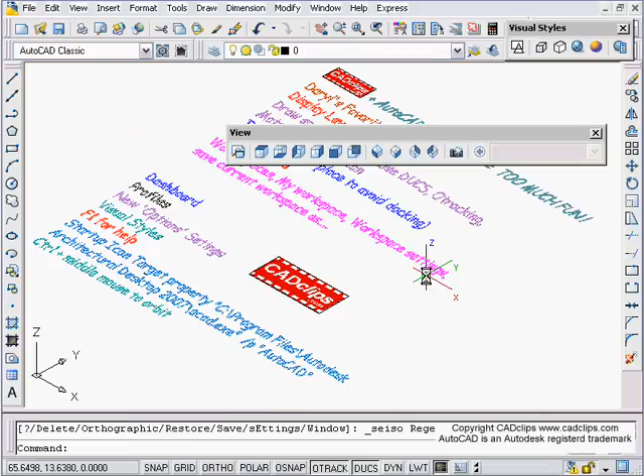So I'm going to zoom out a little bit over to here, and using my view toolbar. If you right click on any toolbar, you can see all the toolbars, and there's lots in there. I'm just going to start by going to, for instance, a southwest isometric view on my view toolbar. And now I want to draw some solid objects or do some modeling. So I'm going to right click in here and grab my modeling toolbar.

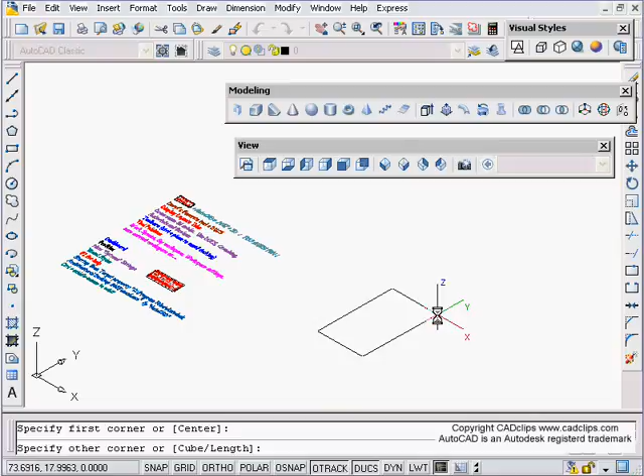We'll show you later how you can use workspaces to save all these configurations. So I can start by clicking on the box tool, drawing a box, placing it up. If I have my visual styles toolbar, you can click on here, and you can see different visual styles for that 3D object. You'll also notice that visual styles actually affect text as well. Kind of neat when you zoom in on it. So different things you can do with that.

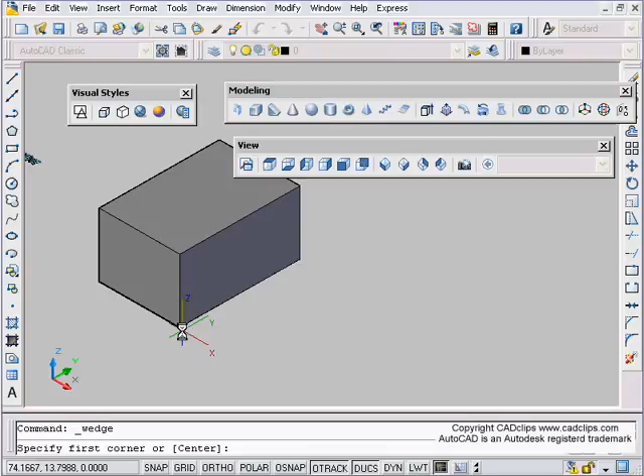Now what I can do is, to continue along here, I'm going to draw kind of a wedge here. So I'm going to click wedge. I need an object snap, so I'm going to hit my F3 or turn my object snaps on, and I'm going to use object tracking and lay a node in over there. Placing it once places it, hovering again removes it. So I need to replace that.

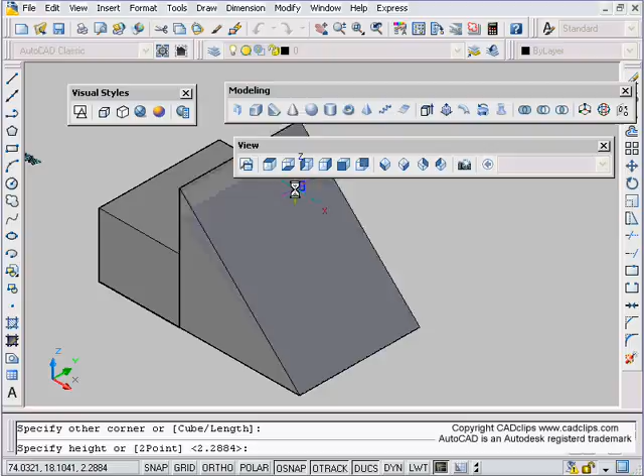Now I can drag down like that, and then I can drag up, and if I can find that endpoint, I can click on there. I might have to change to wireframe to make that a little easier. Let's try that again just so you can see what's going on. I'm going to click on here.

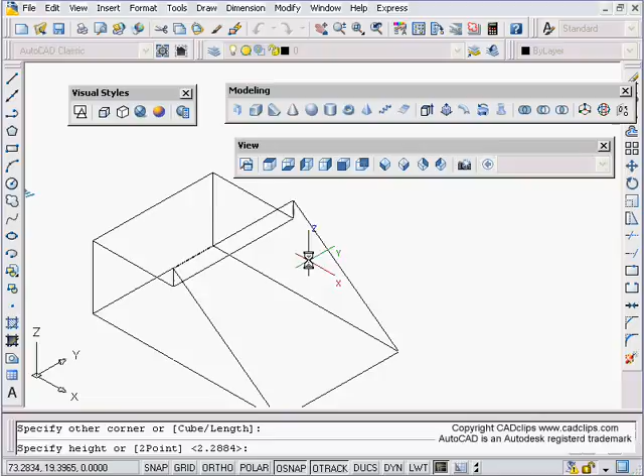I'm going to place, oh, now my UCS. I don't need my DUCS for this one. DUCS. Wedge from here. Notice it started to draw up the side of that wall. Click. And now I can go pick that endpoint. Okay, I had to turn my DUCS off because the purpose of DUCS is that I can do this. Go grab, for instance, a cylinder command.

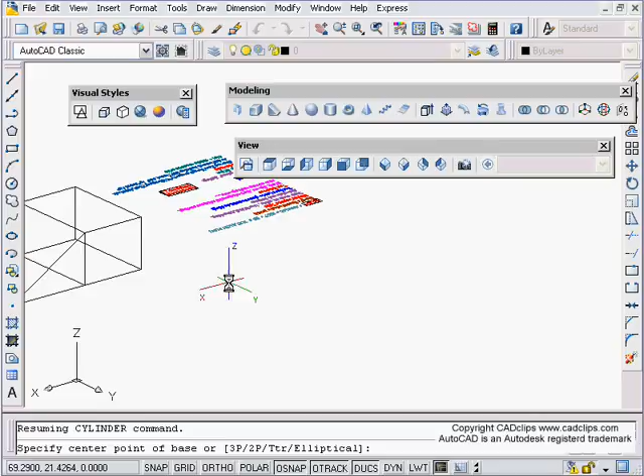If this is on, which was what it was doing before, now I can hover over a different face and draw right on that face, which is absolutely wonderful. And using shift middle mouse button, you can orbit around. So I can pick on a face. Not only that, I can use my object tracking by picking points, a midpoint there and a midpoint there. And if I drag down, guess what? Now I'm drawing that cylinder directly on that face of that object.

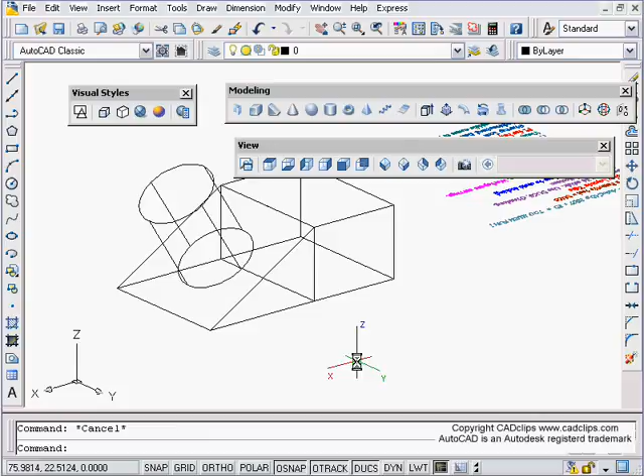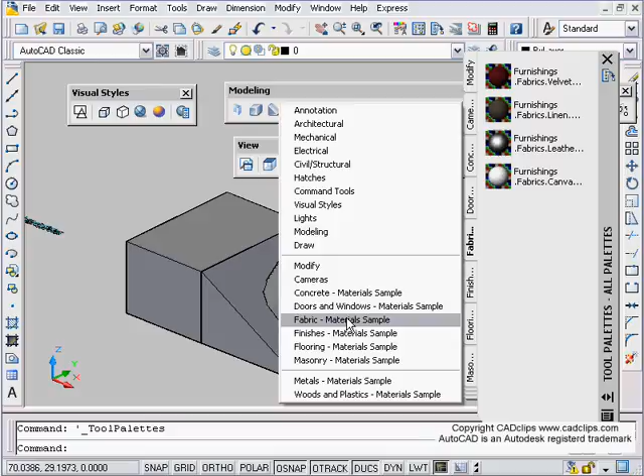Shift, middle mouse button, spin it around, go back to my visual styles, see what I have. I might go into here and click on my palettes. Inside of my palettes, I've got lots of different palettes in the palette set, and I can go, for instance, to a fabric material, and I can pick on that material and change that. Depending on my visual style will depend on how that will appear.

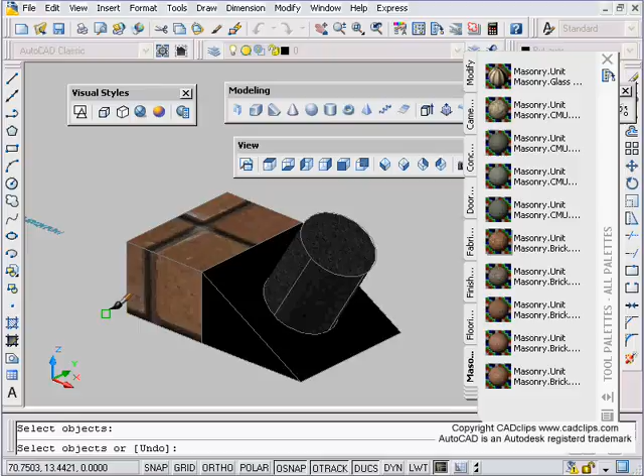Go back to here. Pick a different material, masonry perhaps. Masonry unit, brick modular. Click on there. We can talk a little bit about scale factor and sizes. Pick on here. Use that material, whatever you want. Now I want to draw a cylinder and remove it from there. So watch what happens. I'm going to draw a cylinder now.

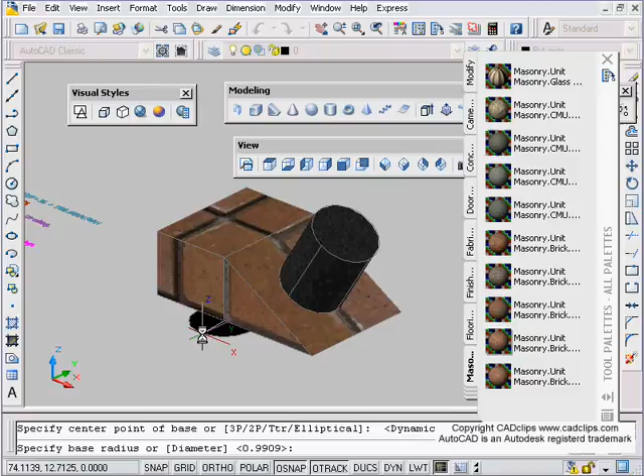The problem now is if I try to draw that cylinder, I'm going to draw on that wall, which is great if that's what I wanted to do. Off of that face, I'm going to erase that. I'm going to draw a cylinder. This is where we need to turn the DUCS on. Pick a point, drag there, drag up. Now I'm going to right click on here, go to my solid editing toolbar, and use my subtract and say subtract from here and here, enter, this object, enter, and it removes that section.

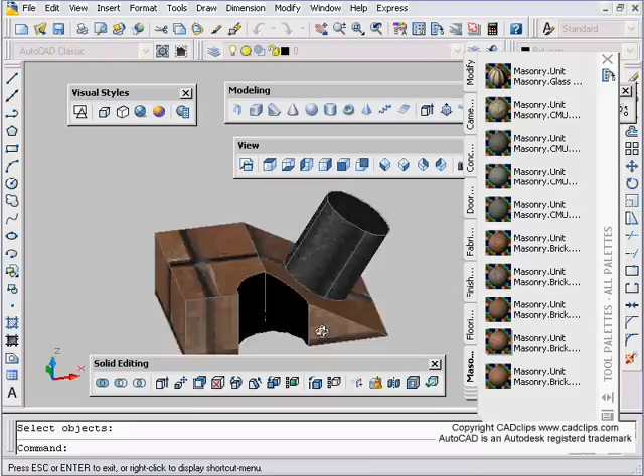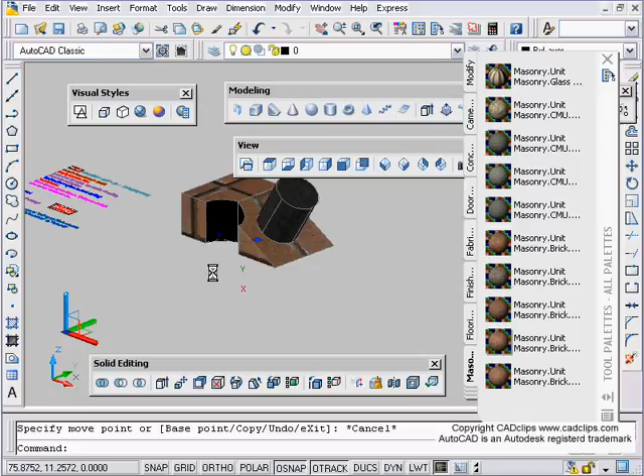Shift, middle mouse button. Anytime you want to move anything, you can click on the object, and then if you go over to your UCS icon, you can click on an axis, and then you don't even have to say move, you just drag it on that axis. If I want to move this straight up, click on this object, hover over the blue axis, pick once, move up, and then type in a number or displacement.

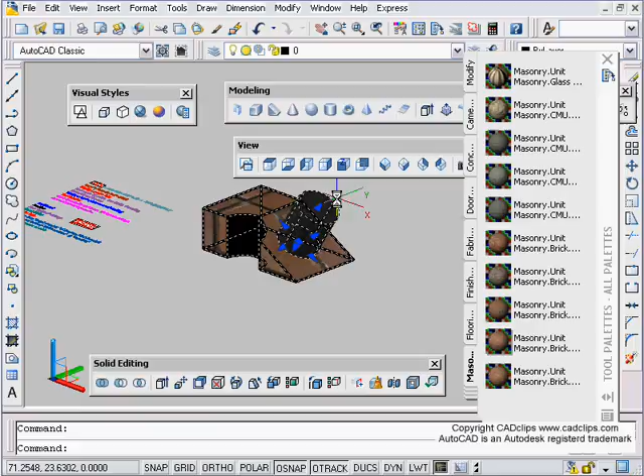What happens if I pick on here and do this? Oh, I have more than one object. Hit escape a couple times. Do a regen. Pick on this one object. Move here, and I can move that guy over there. If I want to switch in between, all I have to do is hit escape, go back and pick on here. I don't have to reselect the object. Look what I'm doing. Pick on here, moving it across.

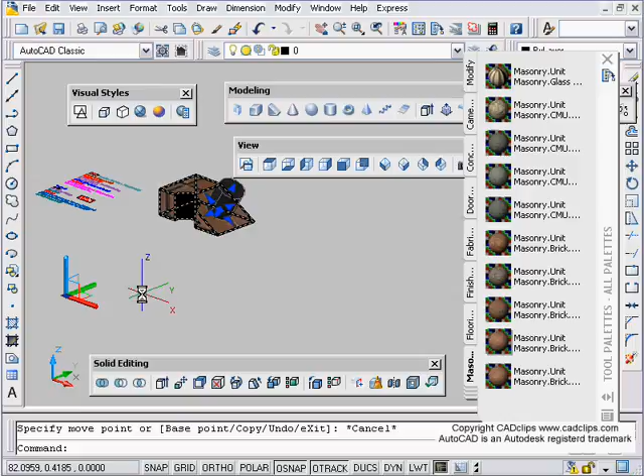So moving in 3D, combining this little tool right in here, you can type in a number, and using our DUCS command to draw on certain faces. Shift, middle mouse button, spin around here.

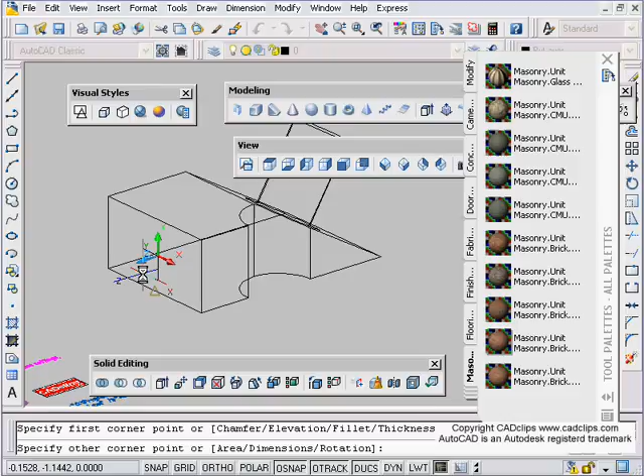Okay, maybe I'll just go back to a hidden view. I want to draw something on there. Okay, I can use my rectangle command. I can hover, place a node, and then I can track to that location, and then I can draw a box. Oh, I used my snap, but that's okay. I can stretch

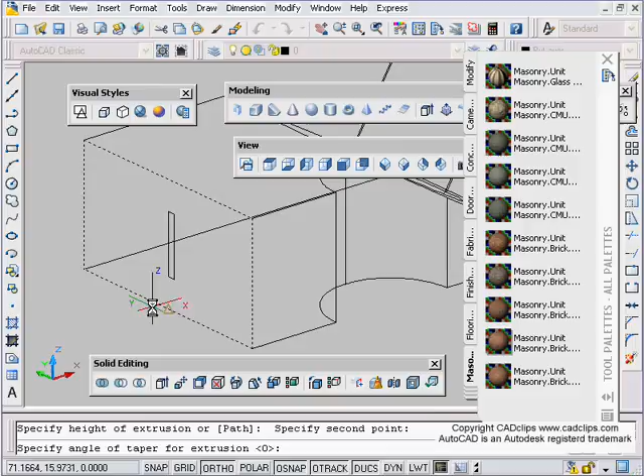or use my shift, grab two grips, move that up. Okay, I can take that and extrude that out if I want. Extrude this, enter, that type of thing. Oh, I extruded the big piece.

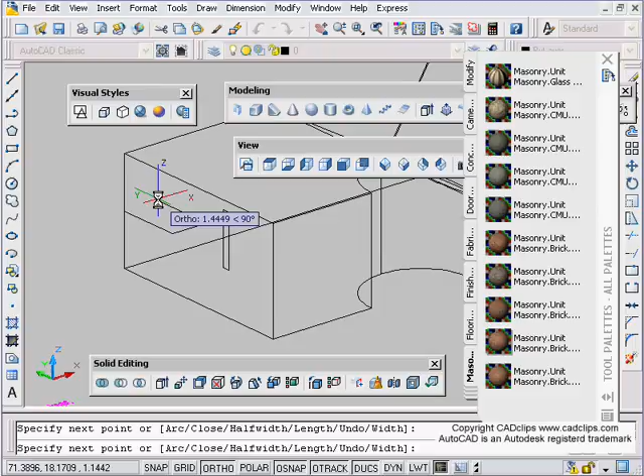Okay, so anytime you want to draw an object or an arc, you can pick a face, wrong type of arc. Okay, maybe a polyline from here over, and around depending on what you want. Place a snap mode, click, click. Okay, start it on that face. Doesn't matter. Shift middle mouse button. You can see where that is.

Okay, visual styles, etc. So just kind of puttering around a little bit with drawing on edges and drawing on faces, and we'll get into more of this a little bit later where I'll show you a little bit more control. Okay, so let's just go back to the top view here. Okay, use DUCS, the layouts tab, draw some solids, use our command, object tracking, throw some materials, and Boolean operation, which is our add and subtract and union and interference.

Okay, we've got a bunch more in here, and we do have some more training videos and CAD clips at DGCAD or CADclips.com, which go through this specifically. I'm not going to go through all of these again. We've already got some CAD clips on that in our 3D AutoCAD 2006, so this hasn't really changed much.

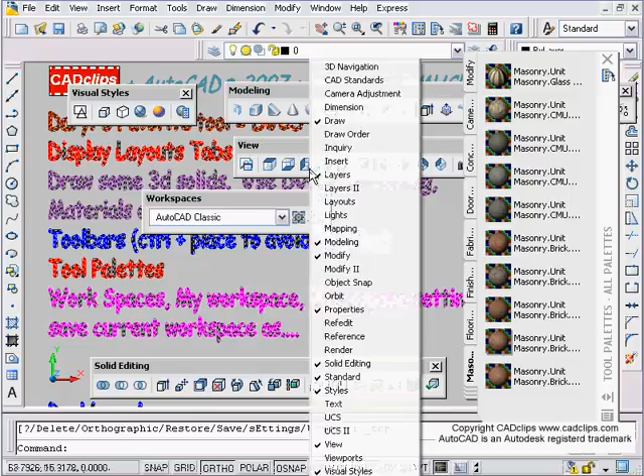So toolbars, now we can right click and get any toolbar, but we can also use workspaces. Once we get all our toolbars the way we want, we have an actual toolbar, if you right click here, called workspaces. Okay, you can't see that. Workspaces. And when that's on, you can click on here and you can switch from, I have one called 3D toolbars. Okay, and I've saved this, and it basically has all the toolbars that we use for 3D.

It's got the workspace toolbar, the modeling toolbar, UCS, UCS2, orbit, walk and fly, cameras, views, lights, rendering, mapping, solid editing. So a lot of these commands in true AutoCAD fashion are on palettes, as well as toolbars, as well as menu clicks, as well as typing. Okay, so I just happen to have a workspace called 3D toolbars.

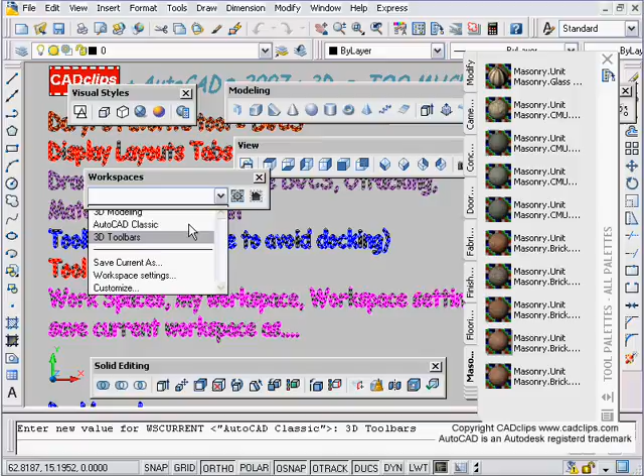Okay, if I turn this off and then I switch over to here, watch, I'll turn the modeling one off as well. Okay, and I'll switch over to the AutoCAD Classic workspace. This remembers this was the one I was working in beforehand. Now watch, I'm going to go back and switch from here to be my 3D toolbars. And it remembers that I have these toolbars turned off.

So what happens here, and we have one called My Workspace. Okay, we also can go in here and say Workspace Settings. Automatically save workspace settings. So when you switch workspaces, wherever you left off is where it will come back. We used to kind of control this with profiles, and now it's a little bit better than profiles. Okay, you've got new workspaces inside of there. If I hit escape there, if we go down here, we can say save current as.

Well, maybe I've got these three, I'm going to make a new one. So maybe I'm going to turn this off and this off and this off and this off, and I can change the screen of my background. I can turn palettes on and off. I can do whatever I want. Okay, then I can go back to my workspace, probably through my workspace toolbar actually is the best way.

And then I'm going to say save current as, and then I'm not going to use those. I'm going to use a new one and just call it CAD clips, and save it. Now I've got a workspace called CAD clips, and then I've got one called 3D toolbars. Okay, and then I've got one called 3D modeling, which comes out of the box with AutoCAD.

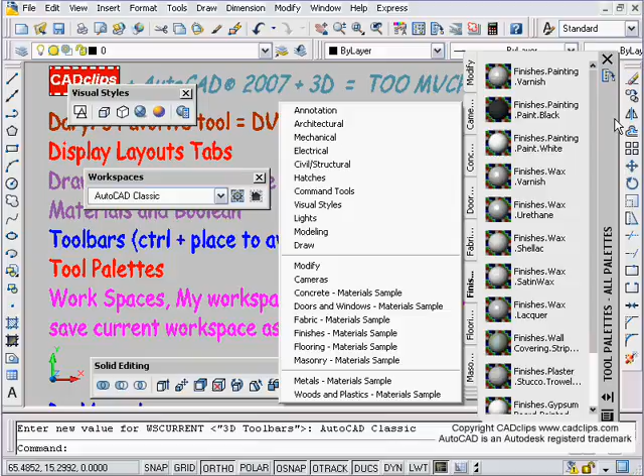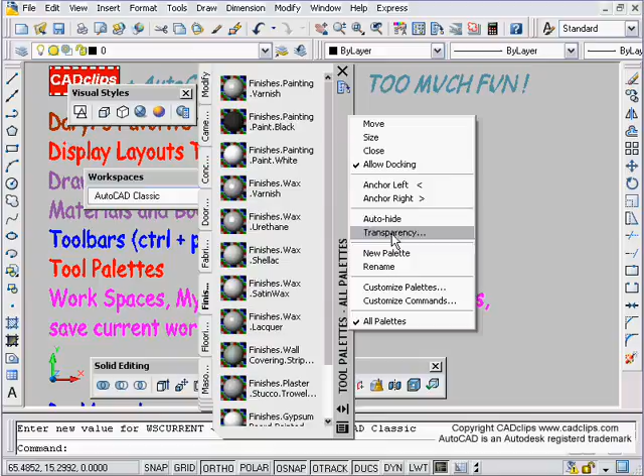Down in here, you can right click on a palette anytime. You can make it dockable. You can add transparency into this palette. You can customize, which is the same window we were just in. You can make a new palette. You can drag objects from the screen to the palettes. You can drag stuff from the customize window to the palettes, and then you can use the palettes. And then your palettes are saved in under your options.

If you right click on here and you pick options down below, and you go into here, files, and you'll see that down inside of here it says tool palette locations. Okay, and that's where your tool palettes are being saved. And then we've got our profiles over here, okay, that we can have set up. 3D modeling, okay, there's a new tab in our options. Have a look around at all of this stuff.

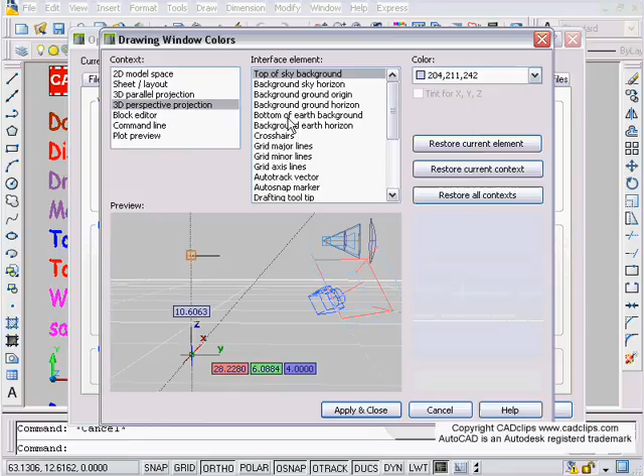Okay, selection has changed a little bit. Okay, drafting, selection. Some of the stuff was new in 2006 and 2007, so have a look through all of this stuff. Display and colors and lots of different ways of setting up your screens and restoring the different features on there.

And I've just noticed one last note here with toolbars. If you ever try to place a toolbar and it keeps docking itself and taking up space like that, if you hold your control button in first and then click it, you can drag those in, you can put it on, and it won't morph itself or dock itself inside of there like this one's doing over here. It's docking itself inside of there. Okay.

And that kind of concludes the first, just the first intro to our new AutoCAD 3D lessons. And we'll do another intro lesson next, and then we'll slow it down and actually do some drafting and some 3D modeling where we can kind of see the tools in action. So stay tuned for more great 3D information.